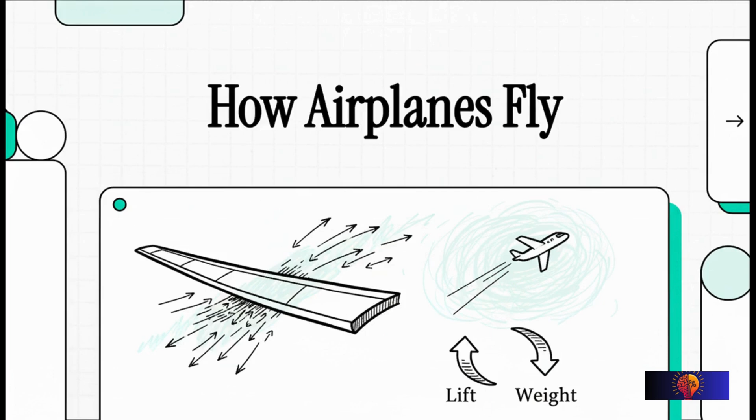Because really, that's the big puzzle, isn't it? We're talking about a metal tube that's packed with people, luggage, and fuel, weighing hundreds of tons, and it somehow just lifts up and soars through the sky. Spoiler alert, it's not magic, it's physics. And it all boils down to a constant, invisible battle happening around the plane.

You see, every single second an airplane is in the air, it's caught in the middle of this epic tug-of-war between four fundamental forces. If you can understand this balance, you're well on your way to understanding flight. So let's break down who's pulling on which rope.

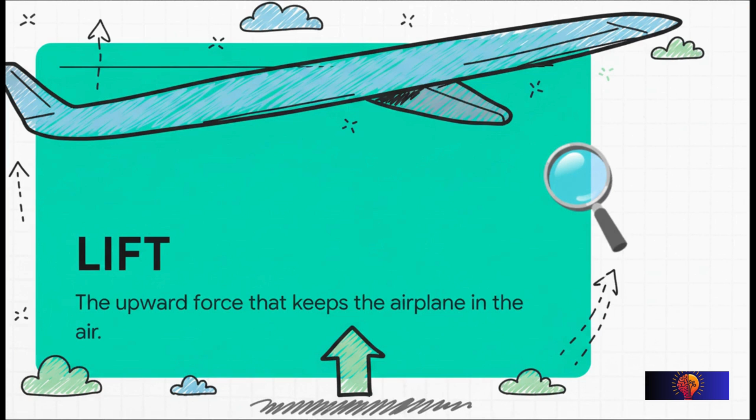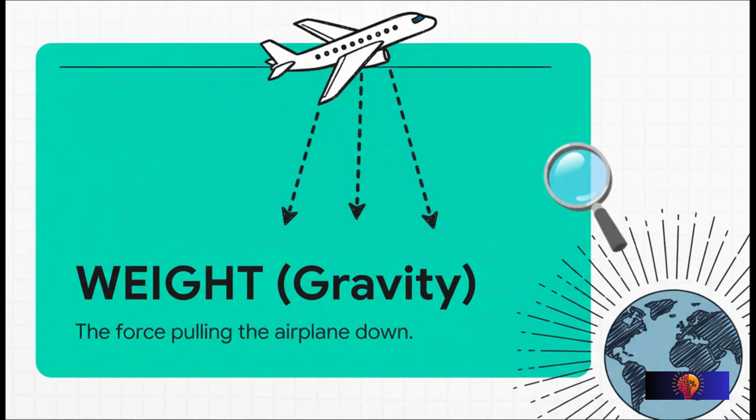All right, so first up in this tug-of-war, you've got the vertical forces. On one side, you have lift. This is the hero force, the one created by the wings that pushes the entire plane upwards. And pulling in the exact opposite direction? That's weight. It's the simple, relentless pull of gravity that's always trying to bring the plane back down to Earth.

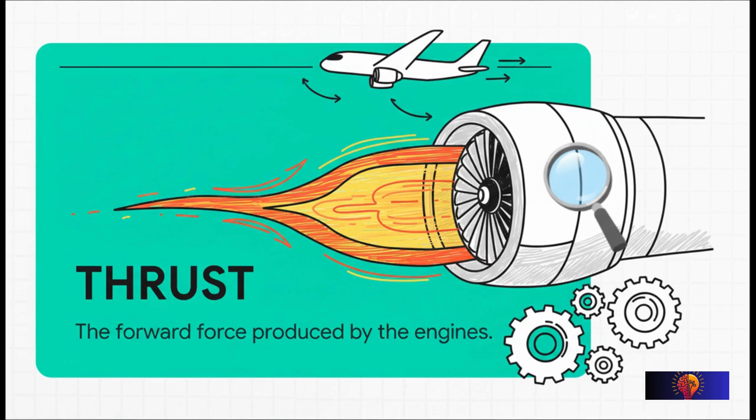Okay, so that's the up and down battle. Now for the front to back. Pushing everything forward, you have thrust. This is the raw power coming from the engines. And the force that's always trying to hold it back is drag. You can just think of it as air resistance. So you've got these four forces in this constant dynamic dance.

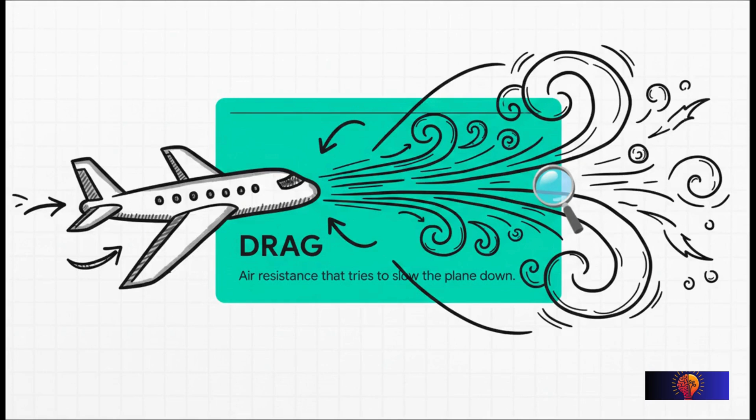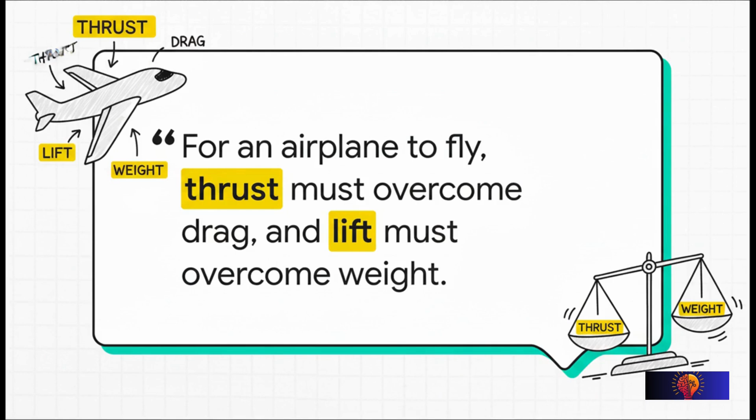So here's the bottom line, the simple rule of thumb for flight. If you want to go up, lift has to be stronger than weight. Simple. Want to speed up? Thrust has got to beat drag. And when you're just cruising along, nice and steady at 30,000 feet, all four of those forces are in this perfect, delicate balance. So that leads to the really big question.

Where does that magical upward force, lift, actually come from? And you might think it's all about the engines, right? But nope, the real magic, the secret sauce, is hidden in the brilliant shape of the wing itself. See that shape? That specific cross-section is called an airfoil. And that noticeable curve on the top, well, that's not just for style points. That curve is pretty much the entire reason a plane can fly. It's designed to play a really clever trick on the air flowing past it.

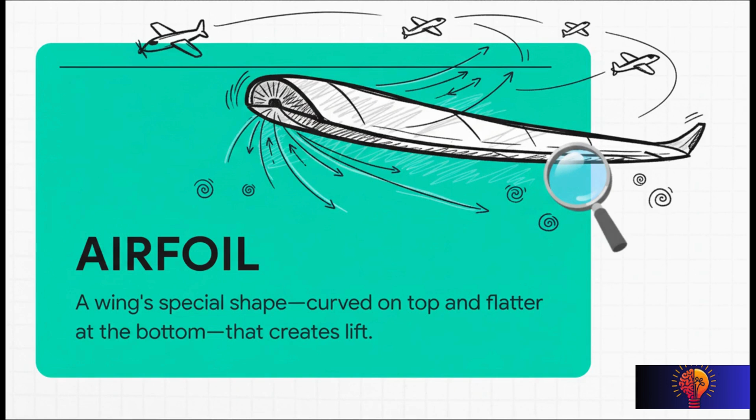Okay, so here's how it works. As the plane moves forward, air hits the front edge of the wing and splits into two streams. Now, because of that curve, the air going over the top has a longer path to travel to meet up with the air at the back. To make that longer journey in the same amount of time, it has to speed up.

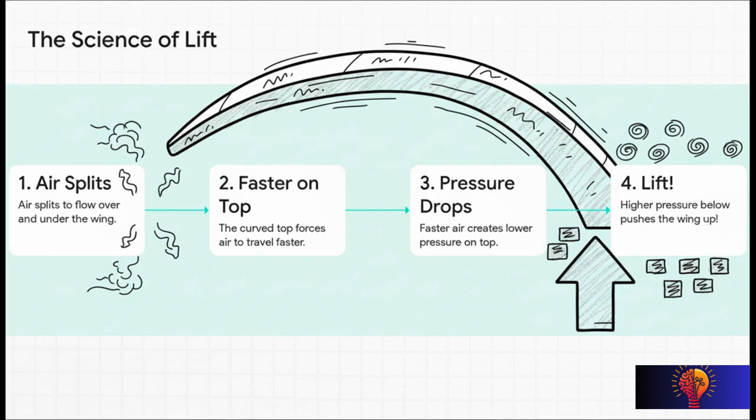And this is where a key piece of physics called Bernoulli's principle kicks in, which basically says that faster-moving air exerts less pressure. So what you get is this amazing pressure difference. You've got a zone of low pressure above the wing, where the air is zipping along, and a zone of higher pressure underneath the wing, where the air is moving slower.

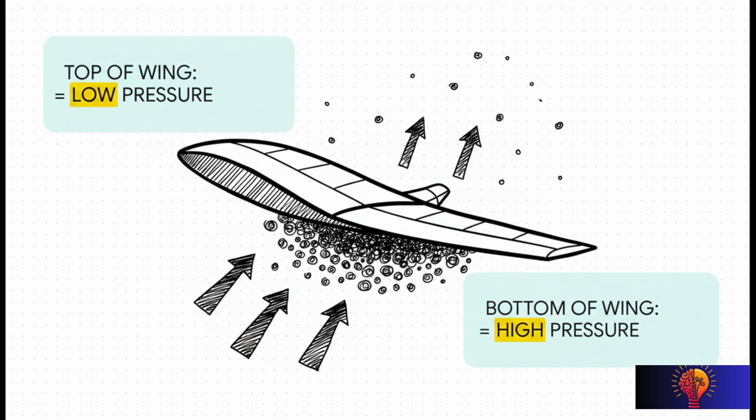And what does high pressure always want to do? It wants to move toward low pressure. So that high pressure below literally pushes the wing up. And boom, that push is lift.

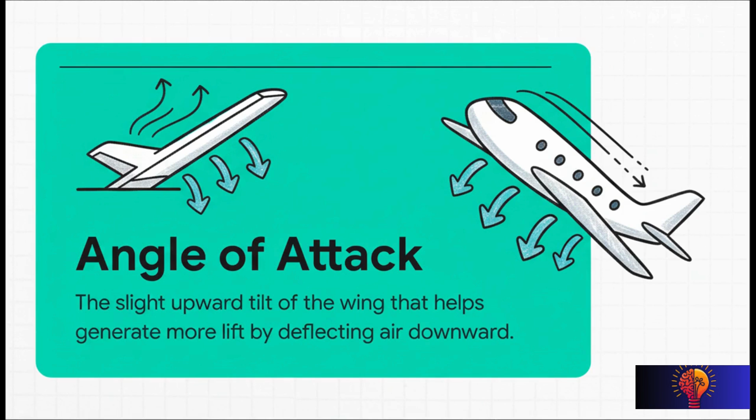But wait, there's more. That's not the only trick up the wing's sleeve. Pilots have another way to generate even more lift. They do it by tilting the nose of the plane up just a little bit, which changes how the wing meets the oncoming air. This is what we call the angle of attack. Think about it this way.

By tilting the wing up, you're now also physically smacking the air and deflecting it downwards. And you probably remember Newton's third law from science class, right? For every action, there is an equal and opposite reaction. So as the wing shoves a massive amount of air down, the air shoves the wing up. It's like getting a 2-for-1 deal on lift.

Okay, so we've got the secret of the wing figured out, but there's a catch. None of this works if the plane is just sitting still on the tarmac. You need air flowing over those wings, and for that you need forward speed. And that is where the engines finally come into play. So how do you get that forward motion?

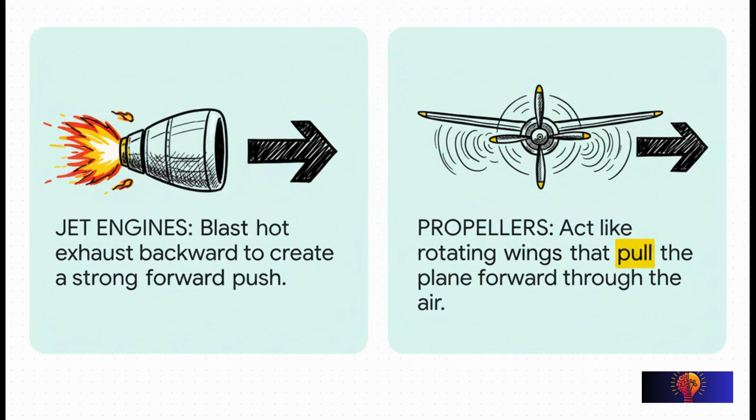Well, whether you're looking at a massive jet engine or an old-school propeller, the basic idea is exactly the same. Throw a whole bunch of air backwards really fast. Jet engines do it by sucking in air, mixing it with fuel, and creating a controlled explosion that blasts out the back. Propellers are basically just spinning wings. They act like big screws, literally pulling the airplane forward through the air.

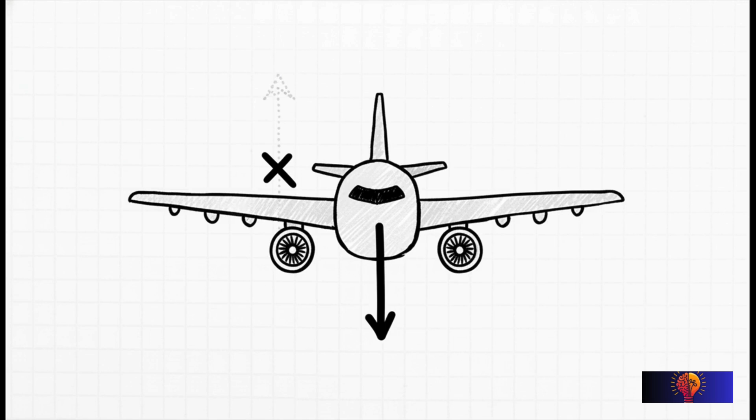And this is a super important point, so listen up. The engines do not lift the plane directly. Let me say that again. The engines' job isn't to lift. Their one and only job is to create enough forward speed, that's the thrust, so that the wings can work their aerodynamic magic. No speed, no lift.

It's really that simple. All right, so the plane is up in the air, it's moving forward, but how do you actually steer it? You can't just turn a steering wheel like in a car. Instead, pilots use these clever little moving surfaces on the wings and the tail to control how the plane moves through the sky.

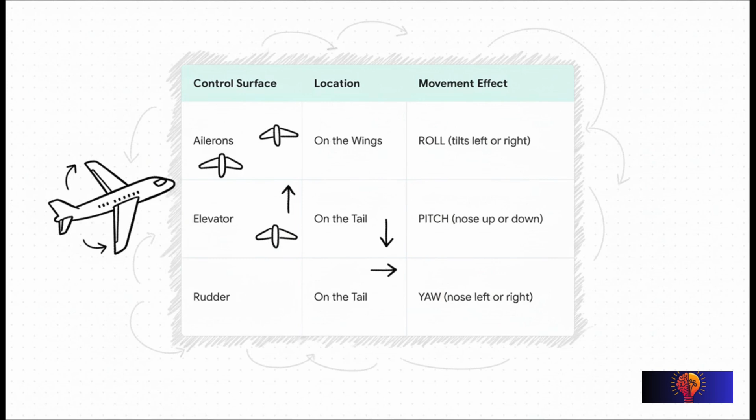Okay, let's look at the pilot's main toolkit. Out on the edges of the wings, you have the ailerons. These control the roll, which is what lets the plane bank or tilt left and right for turns. Then, back on the tail, you have the elevator. This makes the nose pitch up or down, and also on the tail is the rudder, which makes the nose yaw or point left or right. A pilot is constantly making tiny adjustments to all three to fly the plane smoothly.

All right, let's bring it all home. We've talked about the four forces, we've talked about lift, and we've talked about control. Now let's see how it all comes together in the two most critical phases of any flight, taking off and landing.

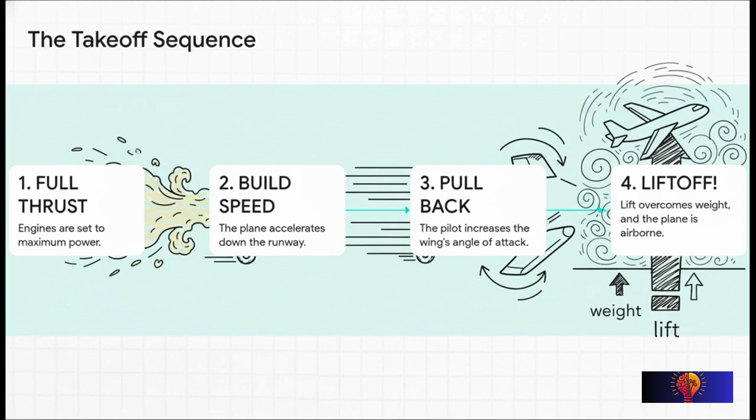For takeoff, it's all about creating a controlled imbalance of those forces. First, the engines roar to life, giving you maximum thrust. The plane starts hurtling down the runway, building up that critical airspeed. Then, at just the right moment, the pilot pulls back on the controls. This increases the angle of attack, and just like that, the force of lift overpowers the force of weight. And there you go, you're flying.

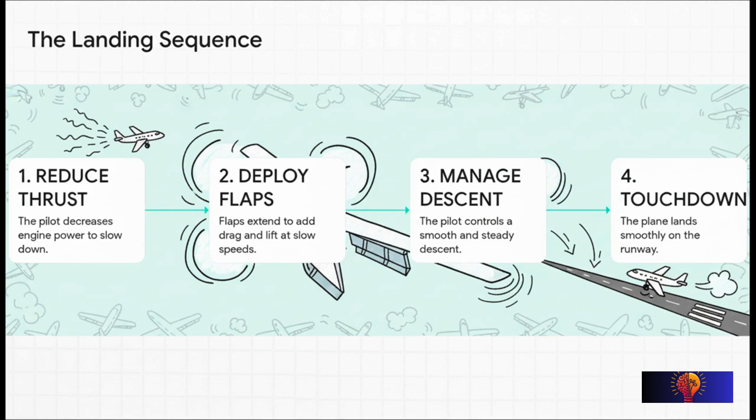Now, landing is basically all of that in reverse, but with a clever twist. The pilot cuts the thrust, so the plane starts to slow down. But wait a second, if you slow down, you lose lift, right? Well, here's the cool part. The pilot extends flaps from the back of the wings. These things are amazing. They increase drag to help slow the plane down, but they also change the wing's shape to create more lift at slower speeds. It's what allows for that nice, gentle touchdown.

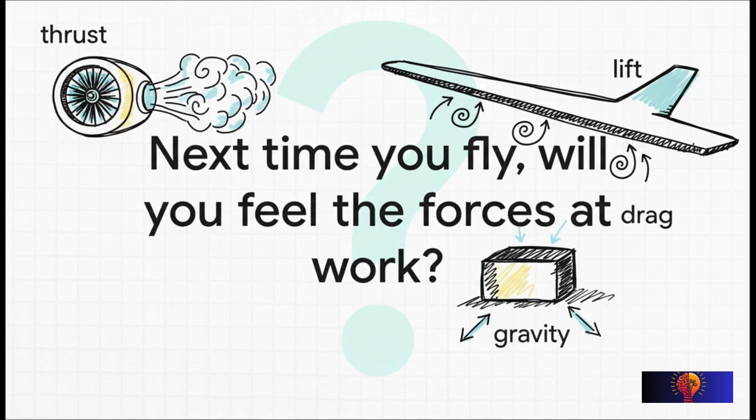So from the roar of the engines creating thrust to the subtle design of the wing creating lift, it turns out flying isn't magic at all. It's just an incredible, constant dance between these four powerful forces. So next time you're on a flight and you feel that powerful pushback into your seat on takeoff, take a second. That's the feeling of thrust winning its battle against drag, and lift getting ready to conquer gravity and carry you into the sky.